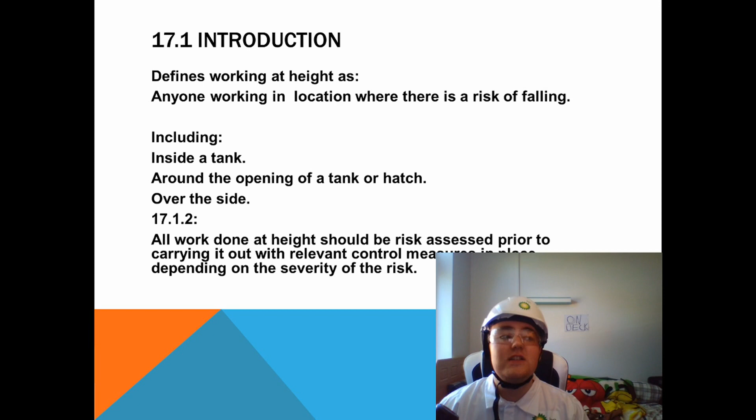17.1 also has a second section which details all work done at height should be risk assessed prior to carrying it out with relevant control measures in place, depending on the severity of the risk. As you can see, I filled my risk assessment out, and so we're ready to go.

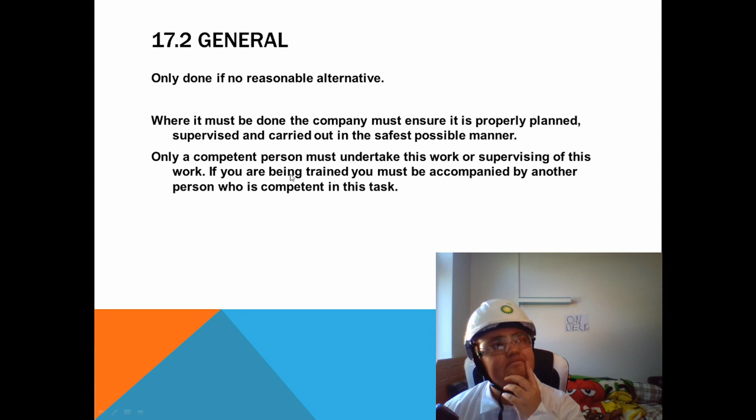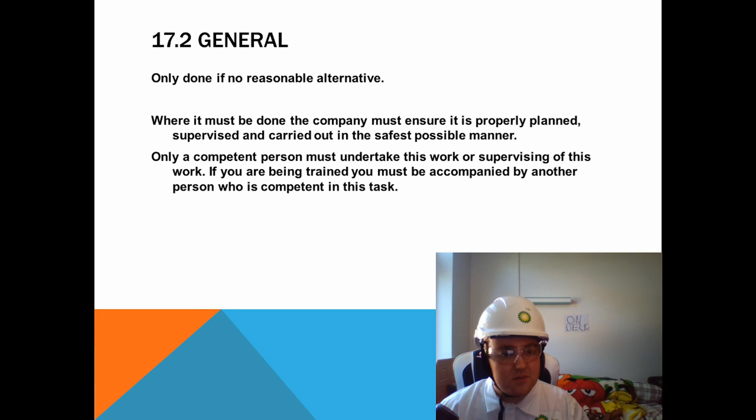17.2, a more general part of COSWP Chapter 17, states that it should only be done if there's no reasonable alternative, and where it is done, the company must ensure it is properly planned, supervised, and carried out in the safest possible manner. Only a competent person must undertake this work, or the supervising of this work, and if you're being trained, you must be accompanied by another person who is competent in this task.

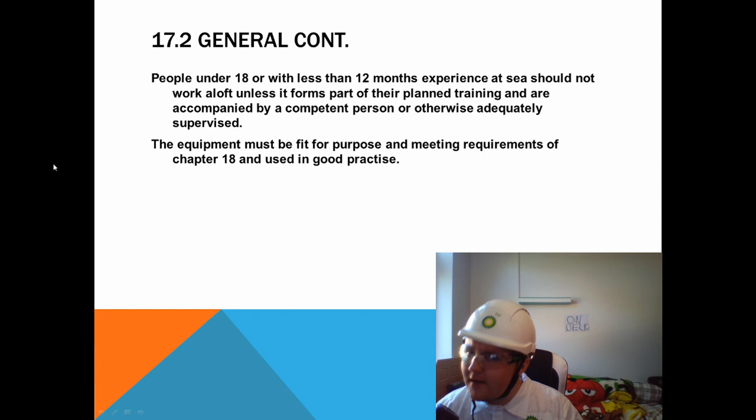17.2 General continued. People under the age of 18 or with less than 12 months experience at sea, like all of you people there, including you. Apart from you, Captain Aslam, not you.

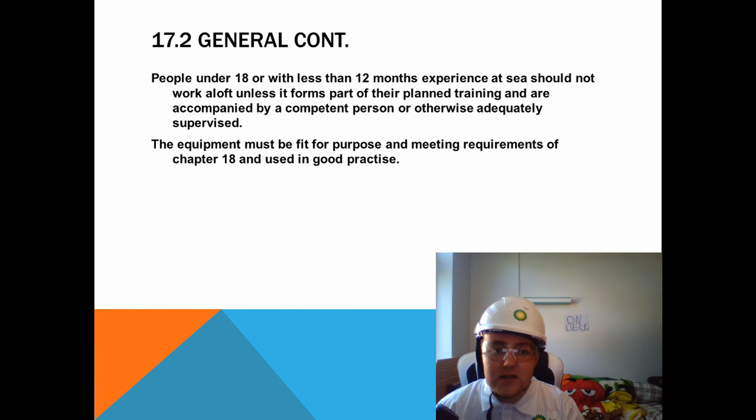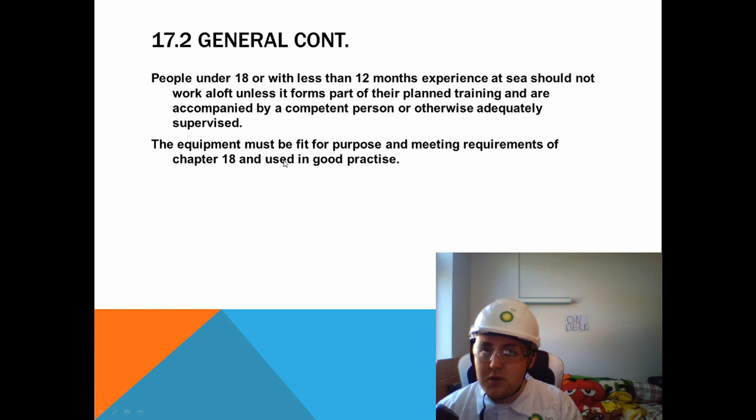It should not be working aloft unless it forms part of their planned training and are accompanied by a competent person or otherwise adequately supervised. The equipment that they are using must be fit for purpose and meeting the requirements of Chapter 18 and used in good practice, i.e. using it correctly. We shouldn't be using the harnesses for other things.

17.2 General continued. When working at height, you will be unable to give your full attention to both the job and not plummeting to your death. Therefore, proper precautions should be taken to ensure personal safety, as well as the movement of the ship in seaway and poor weather conditions.

All equipment, as previously mentioned, should be in good working order. Personnel working aloft should wear safety harnesses, lifelines, or other fall arresters. A safety net should be rigged where appropriate. If over the side of the vessel, you should wear a life jacket. And persons on deck should observe.

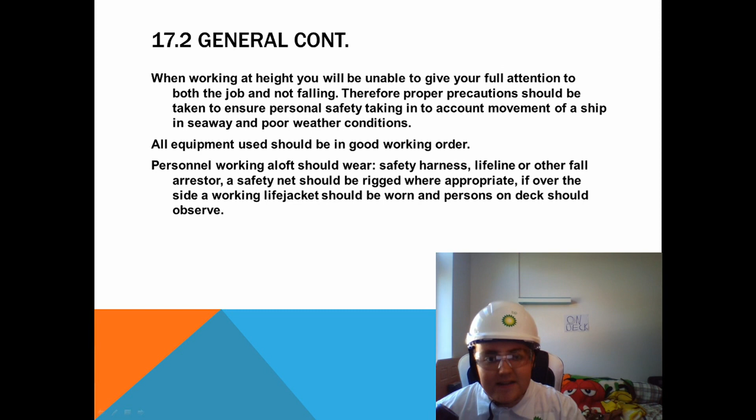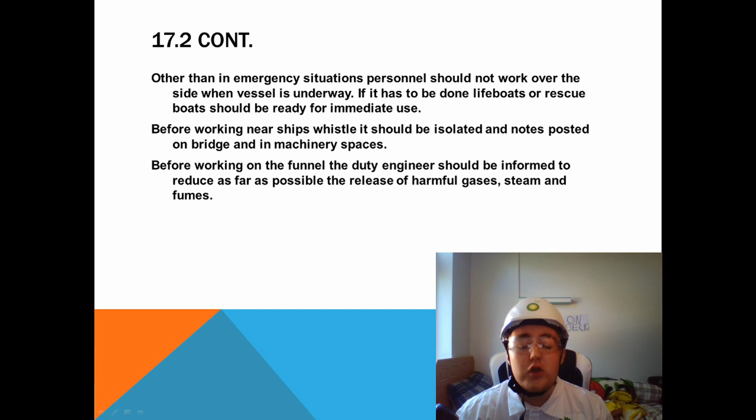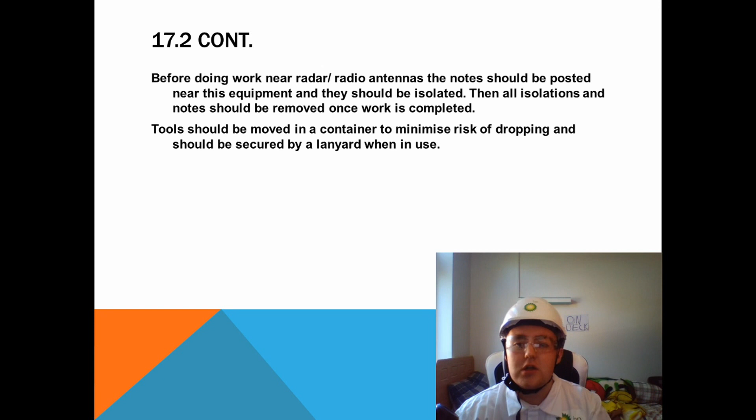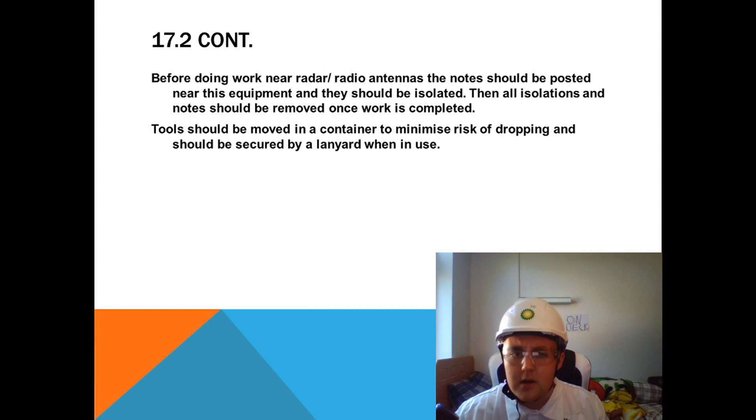17.2 continued yet again. Before doing work near the radar/radio antennas, the notes should be posted near the equipment and they should be isolated. Then all isolations and notes should be removed once the work is completed, not to hinder any of our colleagues. And tools should be moved in a container to minimise risk of dropping them and when in use, they should be secured by a lanyard.

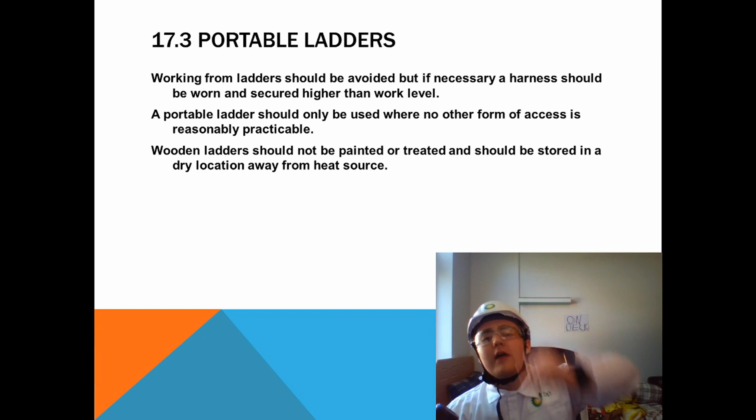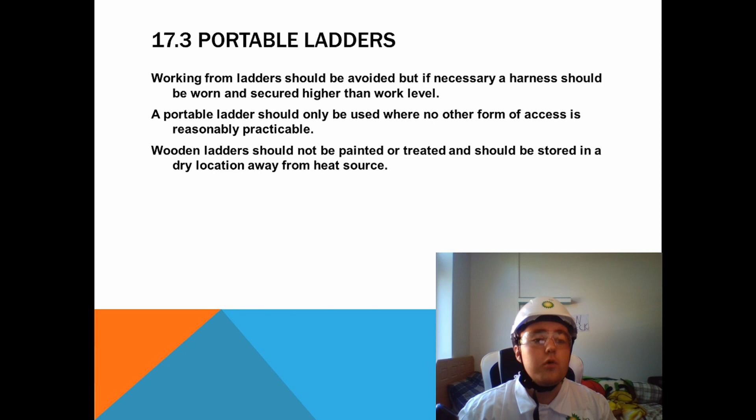17.3 Portable ladders. Working from ladders should be avoided, but if necessary, a harness should be worn and secured higher than the work level. A portable ladder should only be used where there's no other form of access that is reasonably practical. Wooden ladders should not be painted or treated and should be stored in a dry location away from a heat source.

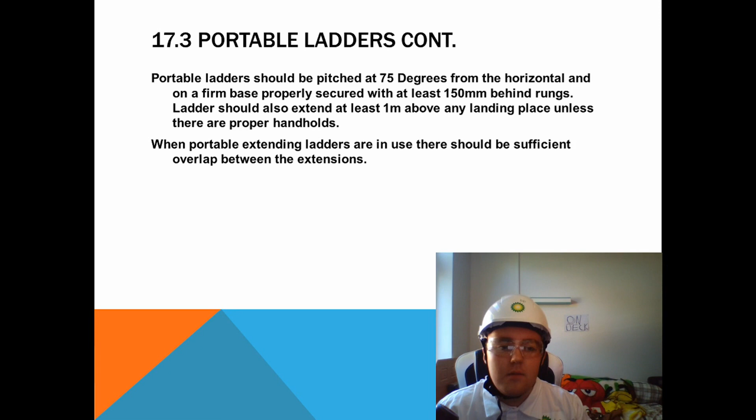17.3 Portable ladders continued. Portable ladders should be pitched at 75 degrees from the horizontal and on a firm base, properly secured with at least 150 millimeters behind the rungs. The ladder should also extend at least 1 meter above any landing place unless there are proper handholds. When portable extending ladders are in use, there should be sufficient overlap between the extensions.

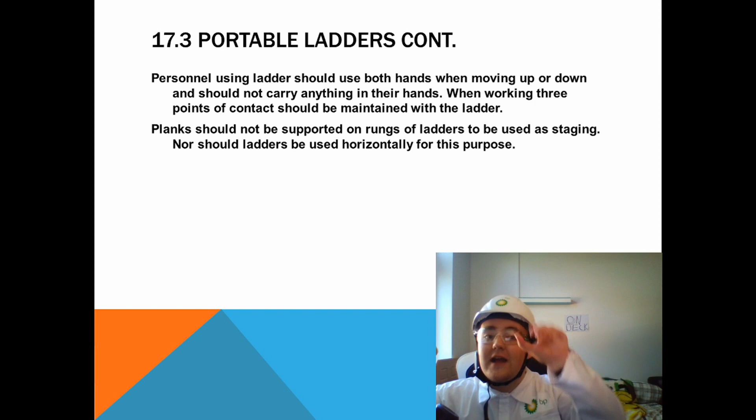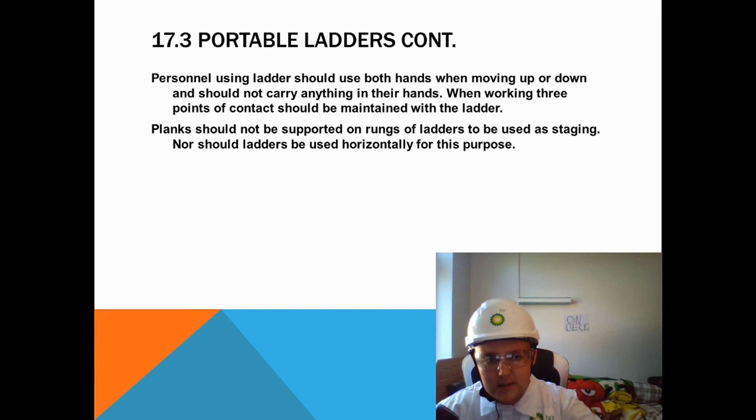17.3 Portable ladders continued. Personnel using ladders should use both hands when moving up or down the ladder and not carry anything in their hands. When working, 3 points of contact should be maintained with the ladder. Planks should not be supported on rungs of the ladder, making a makeshift stage, nor should ladders be used horizontally for this purpose.

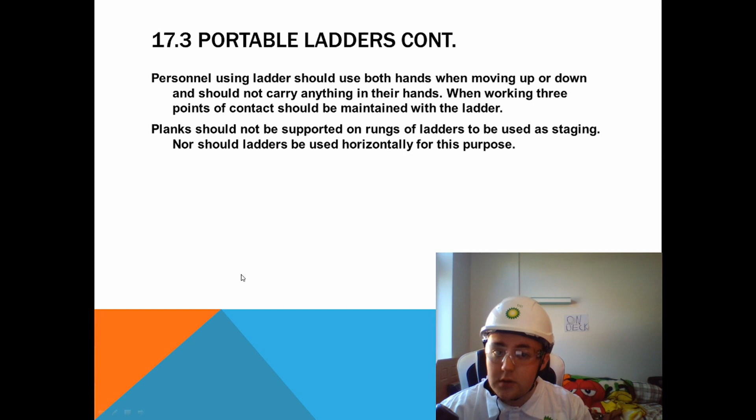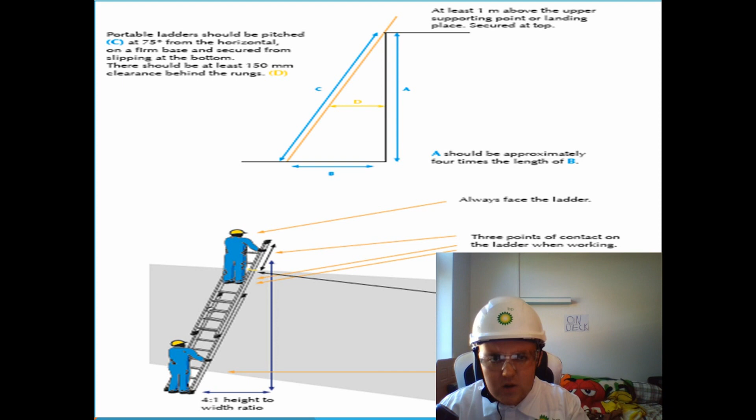I've got a nice graphic just up there. We can see it shows all of the angles, which I can have my assistant provide a copy of to you if you so desire. He might need to go away and print it for you, though he doesn't have any copies with him.

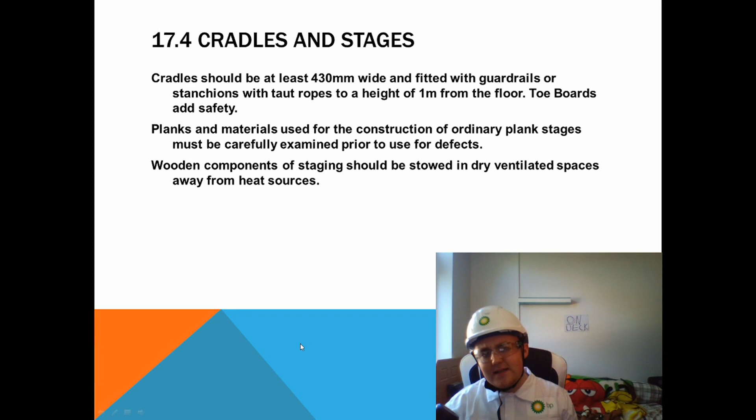17.4 Cradles and stages. Cradles should be at least 430 millimeters wide and fitted with guardrails or stanchions with taut ropes to a height of 1 meter from the floor. Toe boards add safety, so we like lots of toe boards.

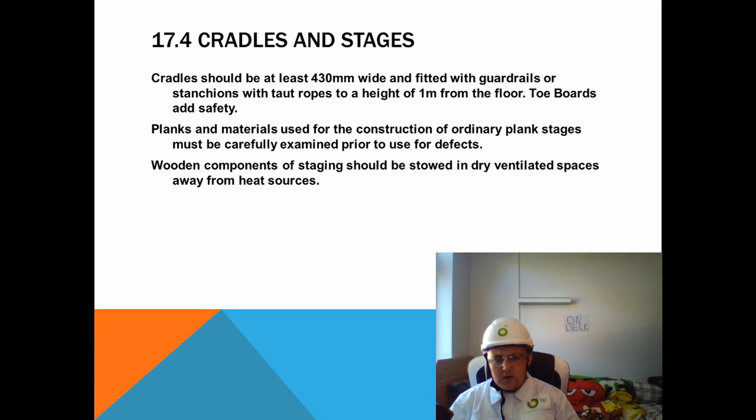Planks and materials used for the construction of ordinary plank stages must be carefully examined for defects. I might even pop on my glasses to really carefully examine them. Now, wooden components of staging should be stowed in dry, ventilated spaces and away from heat sources to prevent further damage.

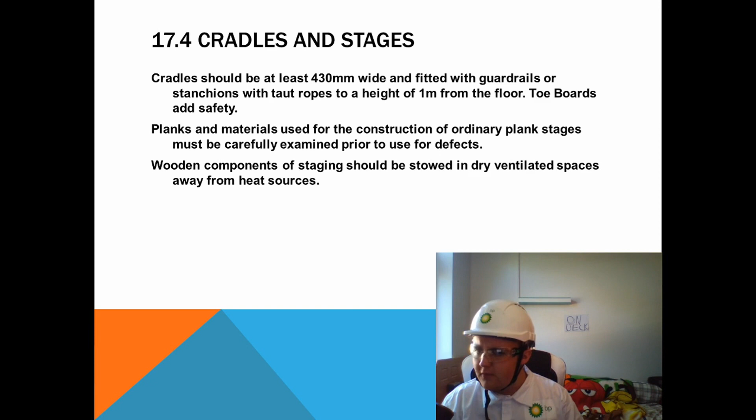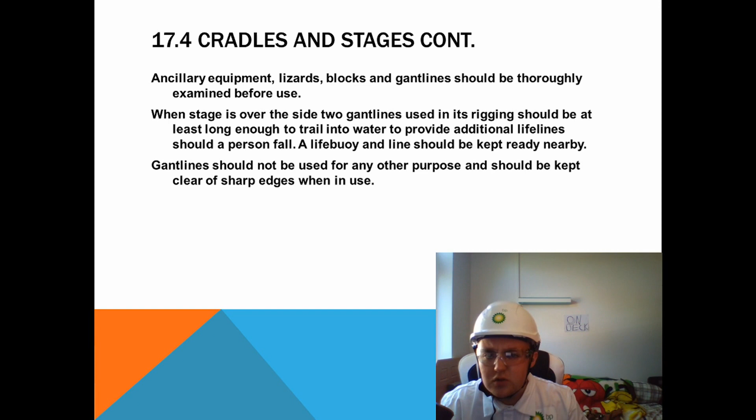17.4 Cradles, stages continued. Ancillary equipment, lizards, presumably not the small reptile, blocks and gantlines should be thoroughly examined before use. When a stage is over the side, 2 gantlines should be used in its rigging and should be long enough to trail into the water below to provide additional lifelines should the person fall. We should also have one of the life buoys, yes, and lines kept ready nearby. Gantlines should not be used for any other purpose, and should be kept clear of sharp edges when in use.

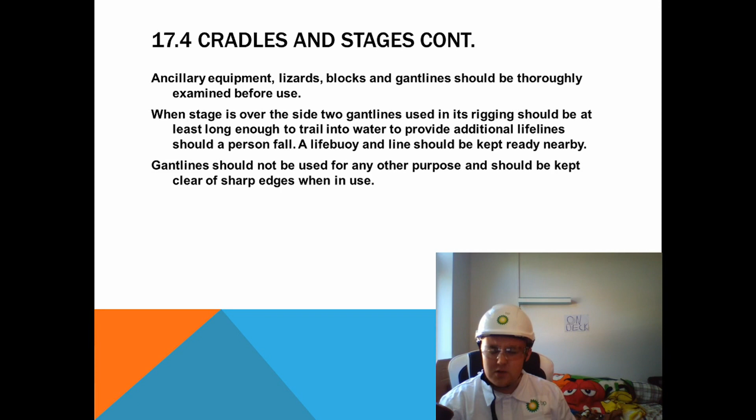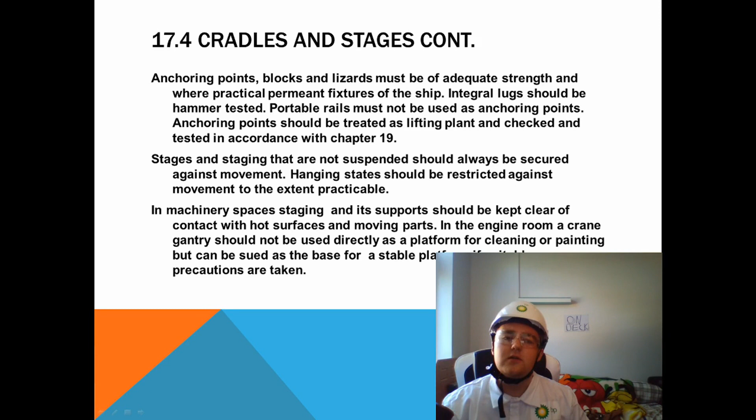17.4 Cradles and stages continued. Anchoring points, blocks and lizards, again presuming not the small reptiles, must be of adequate strength, and where practical, permanent fixtures of the ship, like integral lugs, which should be hammer tested. Portable rails must not be used as anchoring points. Anchoring points should be treated as lifting plant and checked under the other section of COSWP, Chapter 19.

Stages and staging that are not suspended should always be secured against movement, and hanging stages should be restricted against movement to the most practical extent.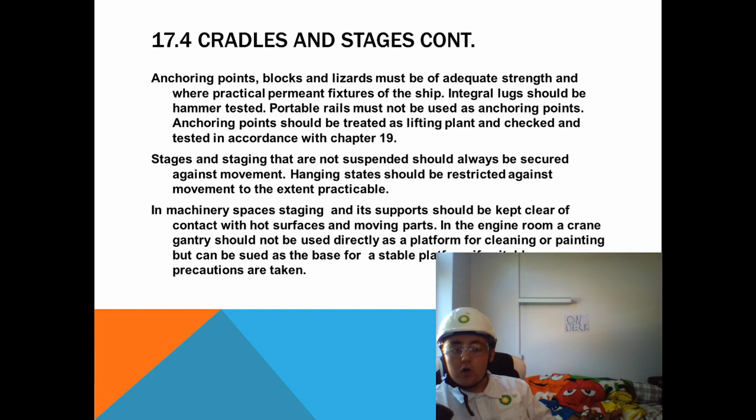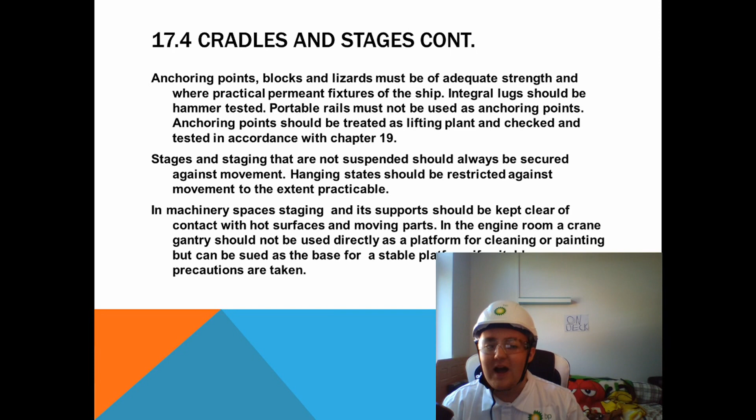In machinery spaces, the staging and its support should be kept clear of contact with hot surfaces or moving parts like the propeller. In the engine room, a crane gantry should not be used directly as a platform for cleaning or painting, but can be used as the base for a stable platform if suitable precautions are taken.

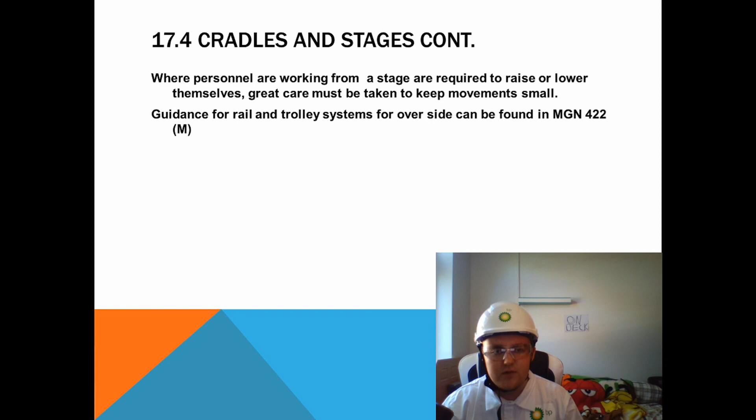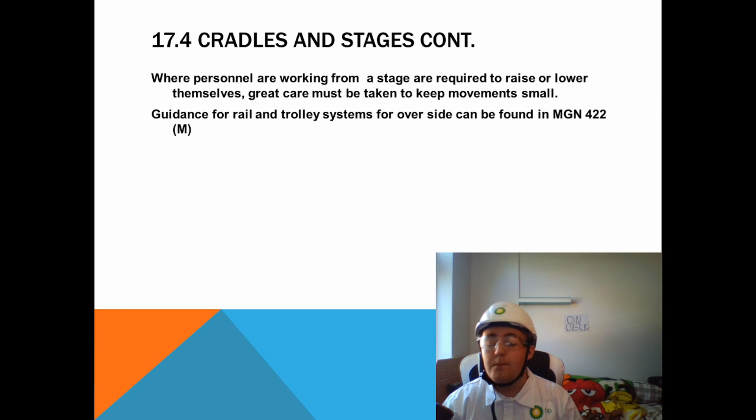17.4 Cradles and stages continued. Where personnel are working from a stage and are required to raise or lower it themselves, great care must be taken to keep movements very, very small. Guidance for rail and trolley systems for overside can be found in MGN 422, that's Mike Golf November, Carte 4, Bisso 2, Bisso 2, open brackets M close brackets.

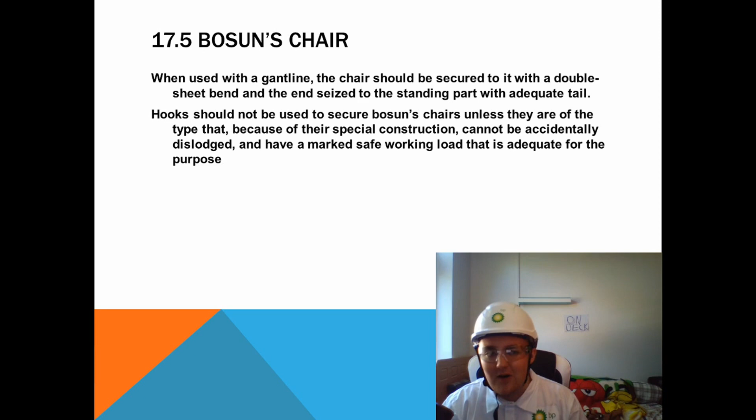Now, 17.5 focuses very much on the bosun's chair. When used with a gantline, the chair should be secured to it with a double sheet bend, one of those fancy knots, and the end should be seized to the standing part with an adequate tail. Hooks shouldn't be used to secure the bosun's chair unless they are of a type that, because of their special construction, cannot be accidentally dislodged, and have a marked safe working load that is adequate for purpose.

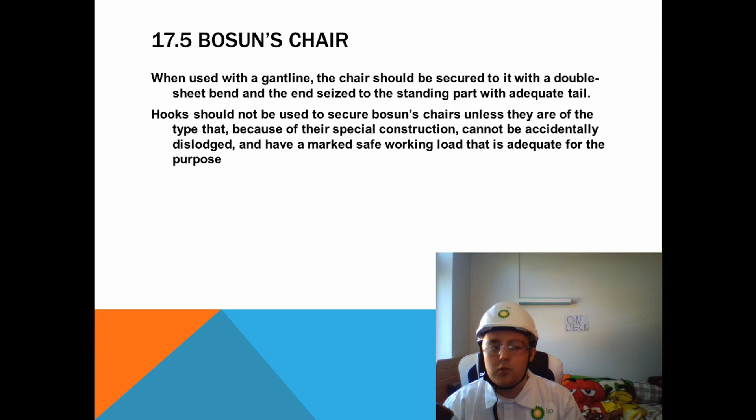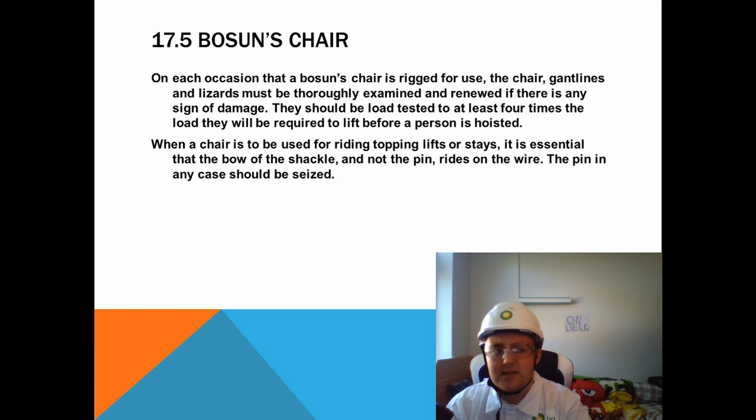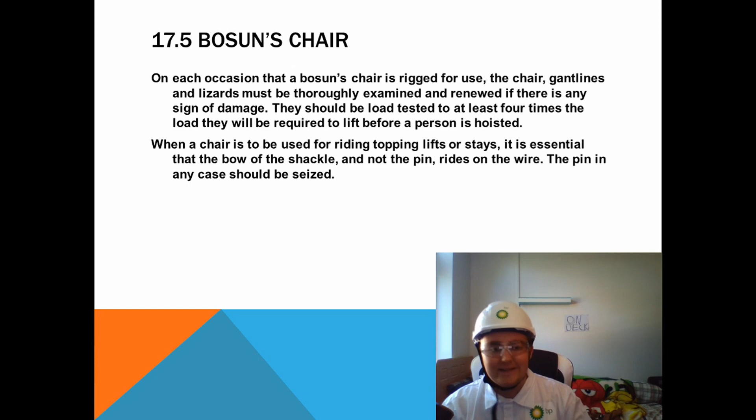17.5, the bosun's chair continued. On each occasion that a bosun's chair is rigged for use, the chair, gantlines, and lizards must be thoroughly examined and renewed to check for any sign of damage. Obviously, if there is any sign of damage, we shouldn't be using that, should we? No. They should also be load tested to at least 4 times the load that they are required to lift before a person is hoisted.

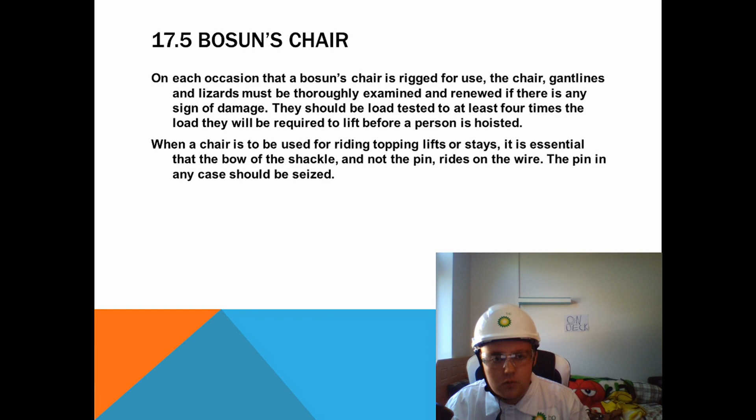When a chair is to be used for riding topping lifts or stays, it is essential that the bow of the shackle, and not the pin, rides on the wire. The pin, in any case, should be seized.

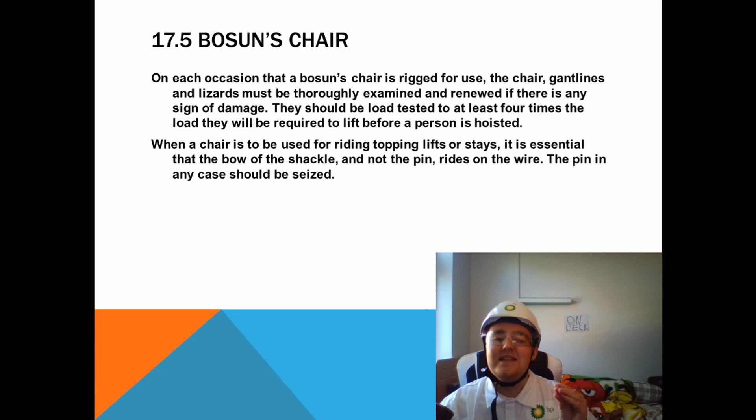More bosun's chair, I must pick up the pace now. When it's necessary to haul a person aloft in the bosun's chair, it's generally done only by hand, rather than by using a winch. In the case of mast access on a large sailing yacht, a winch may be used by a competent person, providing the risk assessment has been completed and effective safety measures are put in place to control the risks identified.

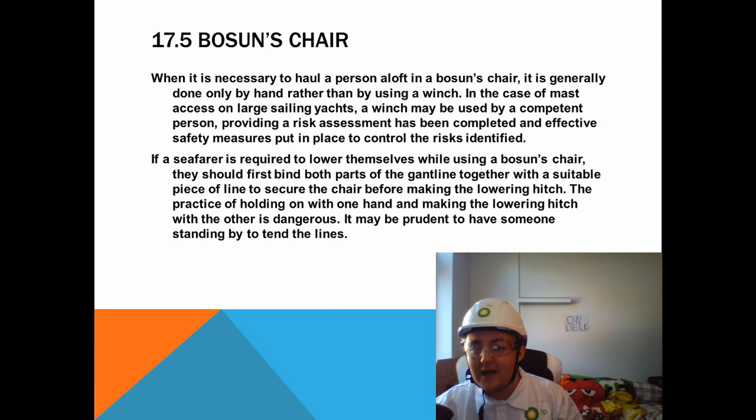If the seafarer is required to lower themselves using the bosun's chair, they should first bind both parts of the gantline together with a suitable piece of line to secure the chair before making the lowering hitch. The practice of holding on with one hand and making the lowering hitch with the other is dangerous. It may be prudent to have someone standing by to tend the lines.

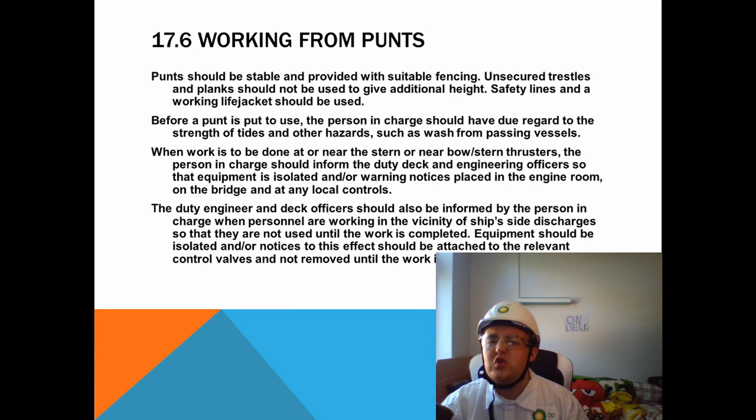17.6, working from punts. Punts should be stable and provided with suitable fencing. Unsecured trestles and planks should not be used to give additional height. Safety lines and a working life jacket should be used.

Before a punt is used, the person in charge should have due regard to the strength of the tides and other hazards, such as wash from passing vessels.

When work is to be done at or near the stern or near bow/stern thrusters, the person in charge should inform the duty deck and engineering officers, so that equipment is isolated and/or warning notices placed in the engine room, on the bridge, and at any local controls.

The duty engineer and deck officers should be informed by the person in charge when there are personnel working in the vicinity of the ship's side discharges, so that they're not used until the work is complete. Equipment should be isolated and notices posted.

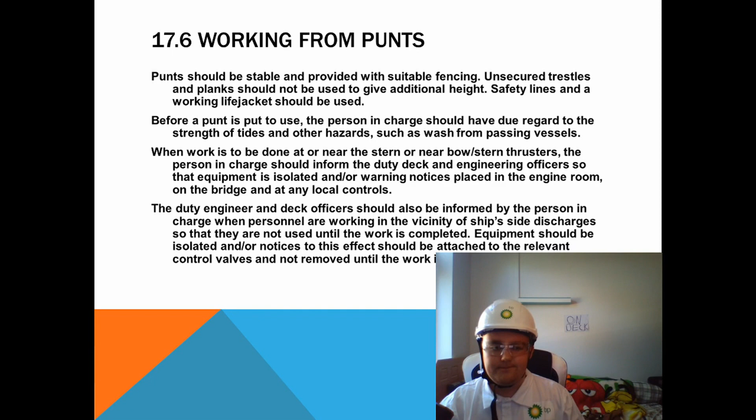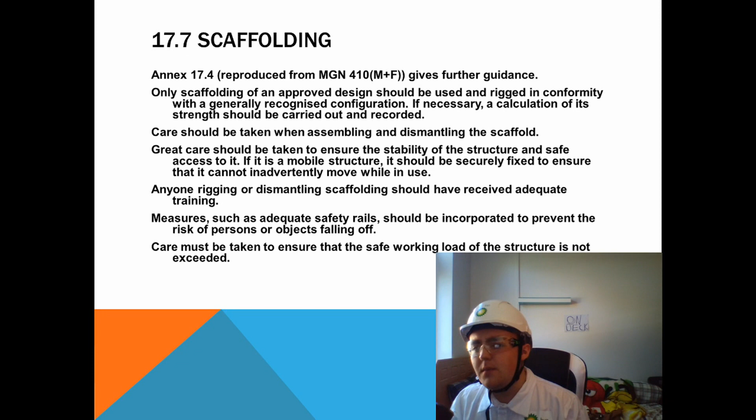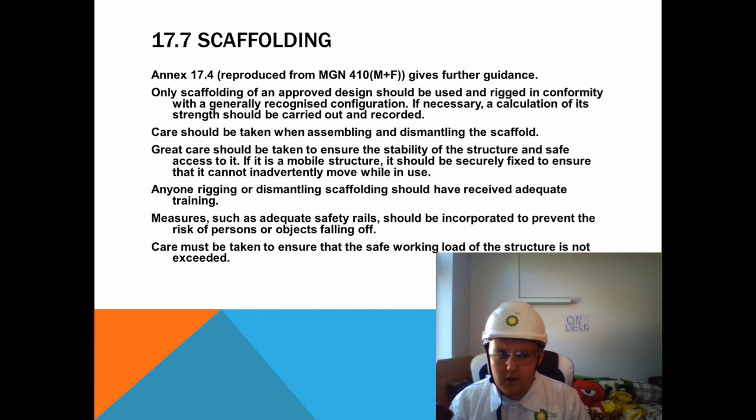If it's a mobile structure, it should be securely fixed to ensure that it is not inadvertently moved while in use. Anyone rigging or dismantling scaffolding should have received adequate training. Measures such as adequate safety rails should be incorporated to prevent the risk of persons or objects falling off. Care must be taken to ensure that the safe working load of the structure is not exceeded.

And well, that's the end of my PowerPoint there. So I suppose I'll wander back inside here. And yes, now I'm inside. I shall take off my safety gear.